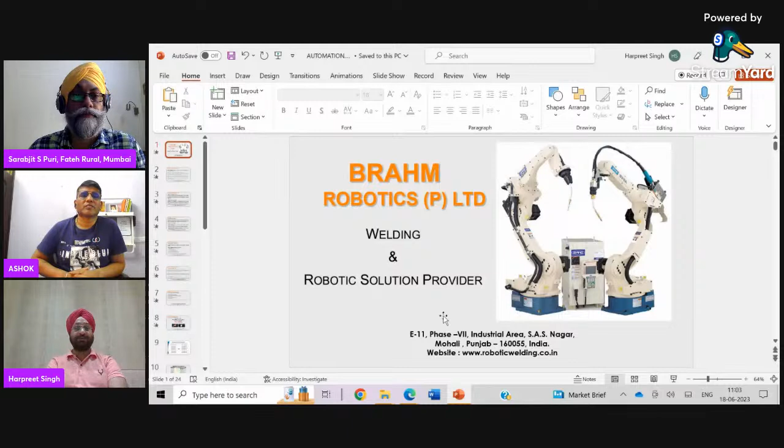So today my main presentation is what is automation, why automation is needed, and how automation can be done, particularly in welding applications, and thereafter, what new technologies have come in welding procedures. So let's start. I am the founder and technical director of Brahm Robotics Private Limited. This company is mainly into welding and robotics. Harpreet, kindly full screen the presentation. Sure.

So at Brahm Robotics, we provide turnkey solutions to customers for welding and robotic applications, and we also do robotic integration. So first, why is there a need for automation in the manufacturing industry? Nowadays we do a lot of repetitive jobs, and there are some potentially dangerous tasks being done by humans.

So automation helps the organization achieve higher productivity and efficiency levels while increasing quality. Automated production systems require less or no human involvement. Such systems also carry out assembly, sorting, testing, welding, and material handling operations. In material handling, heavy parts are lifted and ergonomic issues are there. So these can all be automated. Coming to the next level,

increase in production output. There are a lot of production requirements, so the repeated operations can be automated. This means you can increase your overall production output by having your machines run for longer periods. Furthermore, use of machines can allow you to maximize your production space by adding more workstations. Increased productivity and quality of the products.

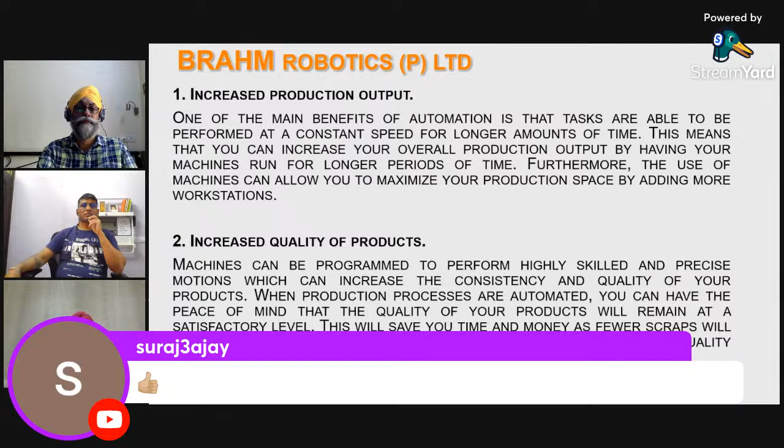Machines can be programmed to perform highly skilled and precise motions. For example, CNC machines and robots can increase the consistency and quality of your product. When production processes are automated, you can have peace of mind that the quality of your products will remain at a satisfactory level. This will save your time and money, as fewer scraps will be generated and rework will be less.

As of today, human safety is more involved. So transferring dangerous tasks to automated machines can make the workplace safer. Since the Occupational Safety and Health Act signed in 1970, the people working there have better safety for their lives and a better workplace.

System versatility. System flexibility: easily retooled and repositioned for your production programs. So this is flexibility in automation. Robots are flexible and can easily be redeployed for new applications. Robots have the ability to easily switch between a wide range of products without completely rebuilding production lines.

Quick changeovers are possible. Auto gripping and vision systems can be incorporated with robots, and the same parts can be run. So in production, it can be batch production also. Mixed products can also be used for robotic automation.

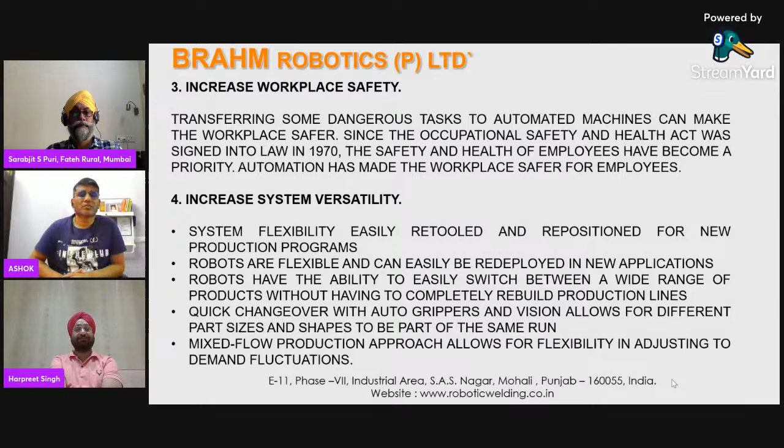Coming to the welding industry, automation in welding is most important as the working area is very hazardous. There's a lot of fumes, a lot of heat. Availability of skilled manpower is also getting scarce. So competition, quality, productivity, price has to compete with these parameters, which is why we look forward to welding process automation.

In automation, there are three major types of possibilities: fixed automation, programmable integrated automation, and flexible automation. As for types of automation in welding, there are special purpose machines, robotic welding automation systems, and robotic welding automation with quick changeover mechanism. I'll be explaining these two headings: automation in industry and the types of automation and their interlinked systems.

A special purpose machine, as the name designates, is used to operate a set of predefined operations. So guys, this is very important in welding.

Please carefully listen to this because this is completely technical and required in almost every industry, be it chemical, mechanical, automation, or any kind of industry. This kind of thing is actually required at every level. So I would request everybody to kindly listen carefully to what Harpreet ji is going to tell you. It is his sheer experience, not theory - it is his experience which he is going to share.

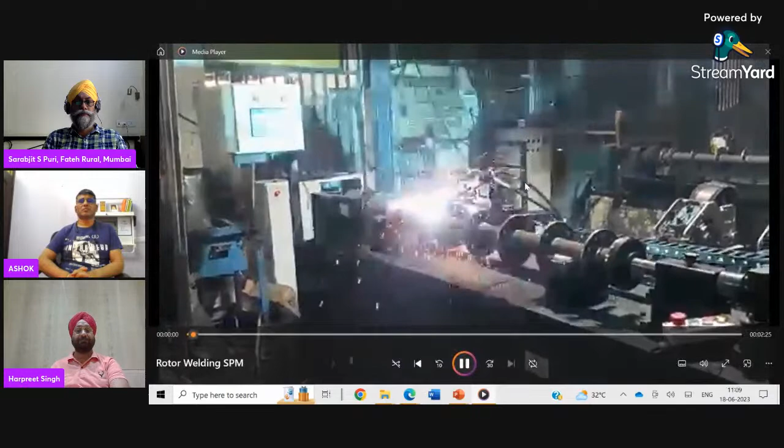So, are you getting my voice? Hello? Yes. This is a typical agriculture component.

Different flanges are there at a certain pitch. This is an SPM. These components are welded from both sides - the robots are doing the welding. No, this is a special purpose machine, and this will be doing this very application.

In this particular application, there is an application of pneumatics. This head is moving ahead and back and forth - it is loaded on a cylinder, a pneumatic cylinder, which moves this head forward.

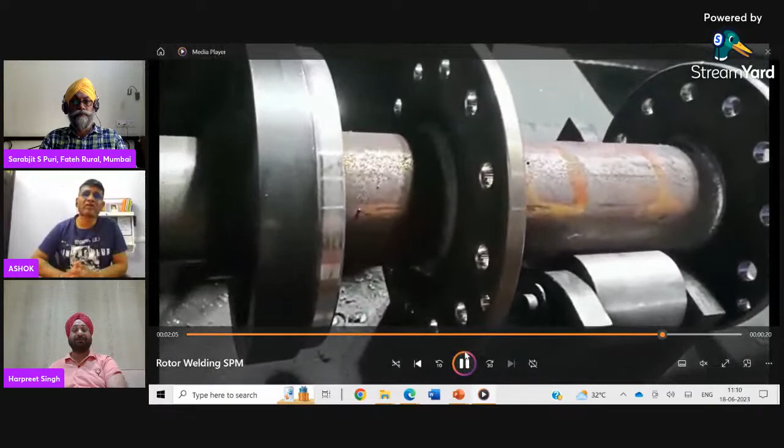Everything is being programmed through PLC, and HMI, the human machine interface, is where we can select the variety of component which has already been preprogrammed into the SPM. So once the batch is completed, you can run the next pre-programmed component on the SPM.

Coming to the SPM, this is an example of fixed automation. Like I explained earlier, fixed automation means you are doing a particular job operation - it is also known as hard automation, designed to complete a single set of tasks repeatedly. I think everybody could have understood this SPM format.

Now coming to robotic welding automation - robots are used to weld geometrically different components, some profile components, some larger components, where while welding the operator feels the heat and requires skill. So all these can be collaborated with robotic automation.

Different components are located and clamped in jigs so it can perform welding as per the sequence program. This sequence of program can be reorganized, reprogrammed, and edited any number of times - so it's very flexible to do.

It is a type of programmable integrated automation system. Programmable automation is commonly used in settings where similar items are produced using the same automated steps and tools. I'll just show you one of the videos so you'll get a better understanding of that.

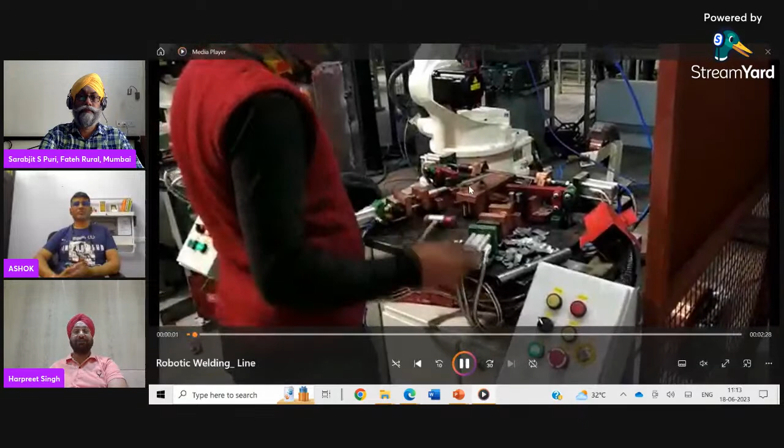So these are the automotive components, different geometry. This is a jig.

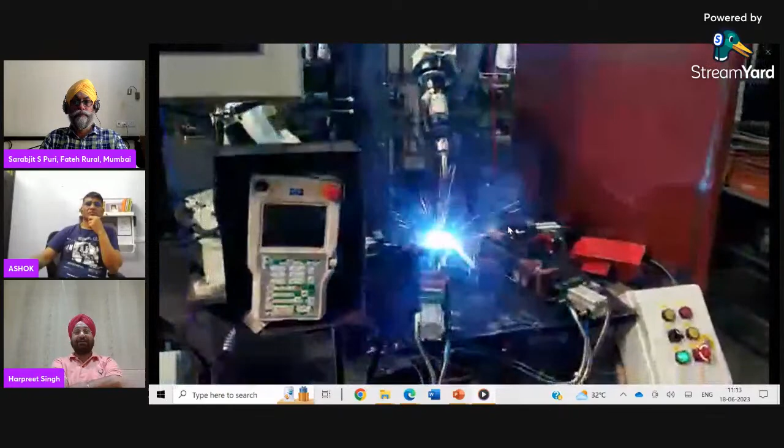This is HMI. All the signals are coming over here, whether the component has been clamped or not. If the operator has missed loading one of the child parts, the system gives an error.

So there are two workstations. One is a loading station, and the other is the unloading station. Once station one completes its job, the robot will finish, while the operator is loading the next job on the second station.

These jigs are designed to the level of poka-yoke also, to eliminate the failure of part rejection.

So again, this system has entire clamping and declamping done by pneumatic cylinders. And these pneumatic cylinders, whether the stroke is forward or reverse, this is also being fed to the HMI.

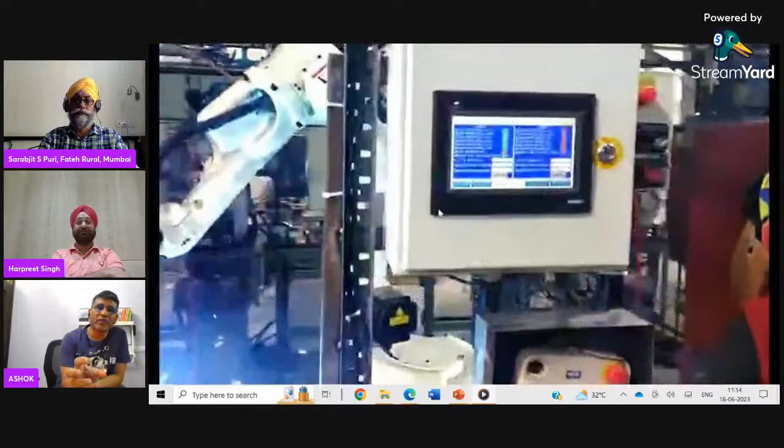That is through the reed switches, which are mounted on the cylinder. So it tells whether it is in forward stroke or reverse stroke. The operator will immediately come to know by reading the reed switches, which show the position of the cylinder.

So guys, there are two comments for you. Karamjeet Singh Gale Saab says, great to see you, Puri Saab. He's very happy to see you, Puri sir.

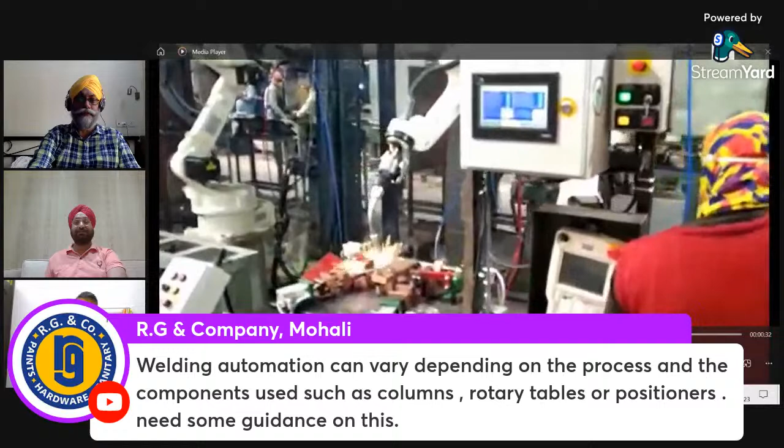And secondly, RG and Company Mohali says, welding automation can vary depending on the process and the components used, such as columns, rotary tables, or positioners. Need some guidance on this. Can you guys please guide us? Yeah, yes.

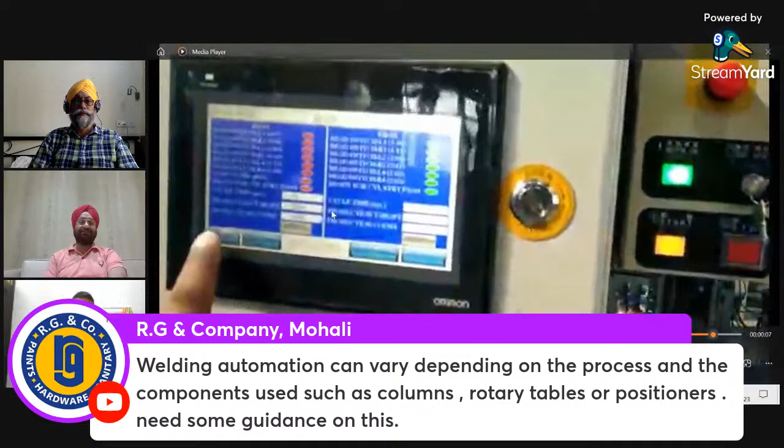Turntables can be also incorporated. I'll show you the videos also, the projects we have done with turntables, friction indexing is there.

So this was a robotic welding automation, and it is a programmable system, as I mentioned earlier, a programmable integrated automation system.

So next comes flexible automation. In flexible automation, integrated automation involves totally automating manufacturing plants with minimal human involvement. Computers can be used, basically this is a CAD-based system, used to design parts, test the completed design, and then fabricate new parts.

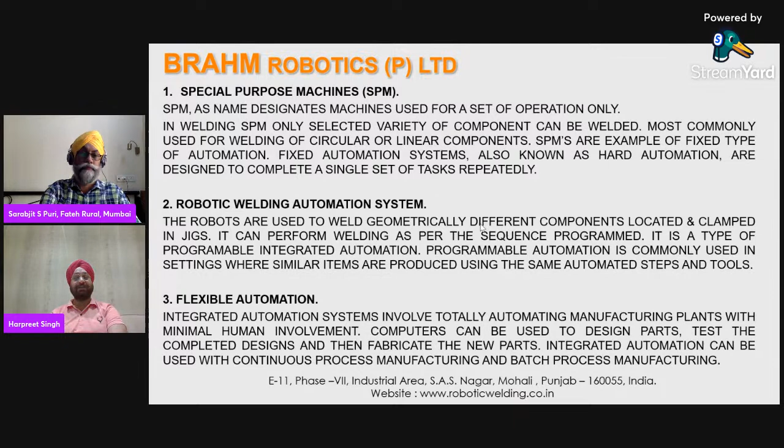So this is a CAM-based programming system. You program your components on your CAM software, then load those programs to the robot, and the jig is all there. Load the component in the jig, and the robot will perform the similar application on the component.

So it's a part of robotic automation also. Integrated automation can be used for continuous process manufacturing and batch process manufacturing. I'll show you one other video.

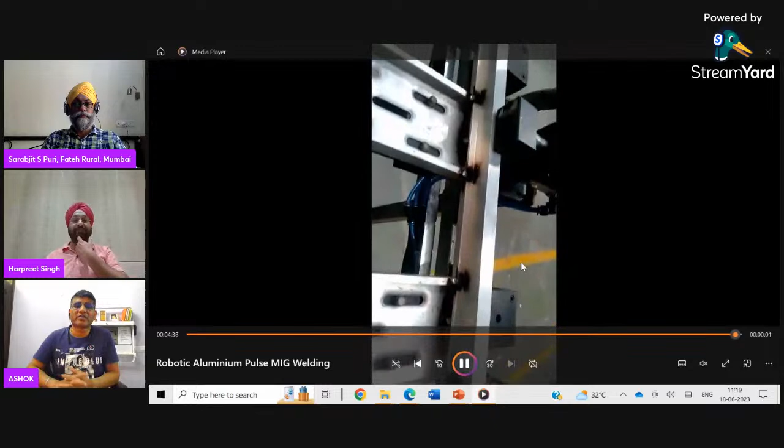And the quality of welding, you can see that it is perfectly consistent. There will be no place where somewhere it will be more or less - this is what we get due to automation. The blackening during weld is due to oxidation, so it has to be cleaned chemically later on.

Now coming to the welding processes that can be automated - the technical name is gas metal arc welding, we call it MIG. Gas tungsten arc welding, known as TIG, then resistance welding, laser welding, flux core welding, plasma welding. These can all be automated through SPM mode also and through robotic mode also.

I'll just show you one of the videos of SPM for the tungsten arc welding.

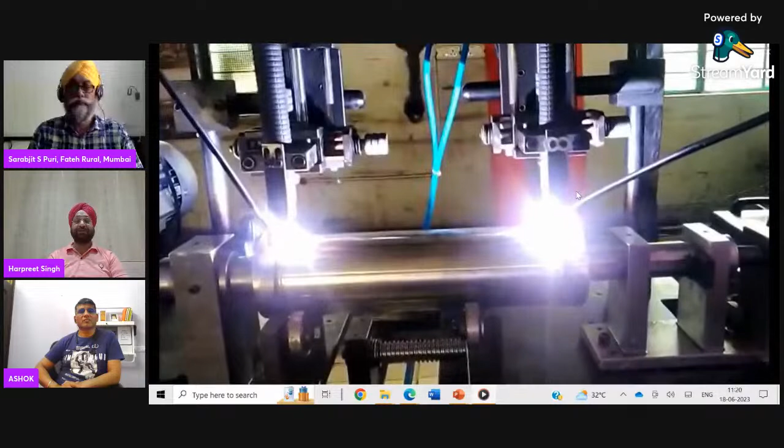This is a submersible motor housing. Both end flanges were welded manually through the TIG process, so we have designed this SPM with an auto TIG filling system. There's a circular part as you can see on the video. The operator only has to load and unload the part, and this machine is designed to adjust different lengths of these cylindrical submersible pumps.

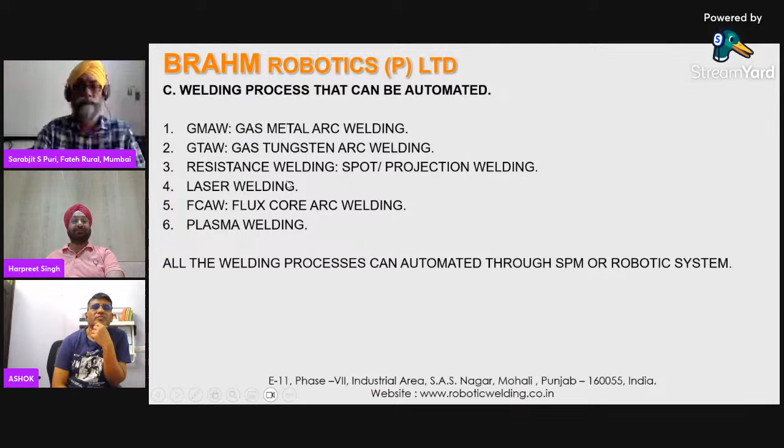The rotation of this cylinder is done through the servo drive, and the torch slide's up and down movement is through pneumatics. So similarly, as I've shown you earlier for MIG welding, the tungsten welding system also works this way.

Now coming to the new technology available in MIG welding applications. As you all know, if the thickness is higher than 15 mm or 20 mm, we have to either prepare a groove and then make multiple layer welding. In that case, there is a lot of distortion also.

Now you can see this is a 20 mm plate. You have to make a large groove, then there are multi-pass weldings, and a lot of distortion is there.

Now there is a new technology that has come up known as D-arc, which is basically a buried arc technology. No groove is required; you just have to give a 1 mm gap between both plates. Single pass with full penetration is there. Can you imagine? The wire size is 1.2 or 1.6. Earlier we were using 1.2 with multiple layers, causing a lot of distortion. This is a single wire pass with wire size also 1.2, but the technology is such that it welds through the part and gives less distortion in the part.

I'll show you one of the videos. Sorry, the video is missing right now.

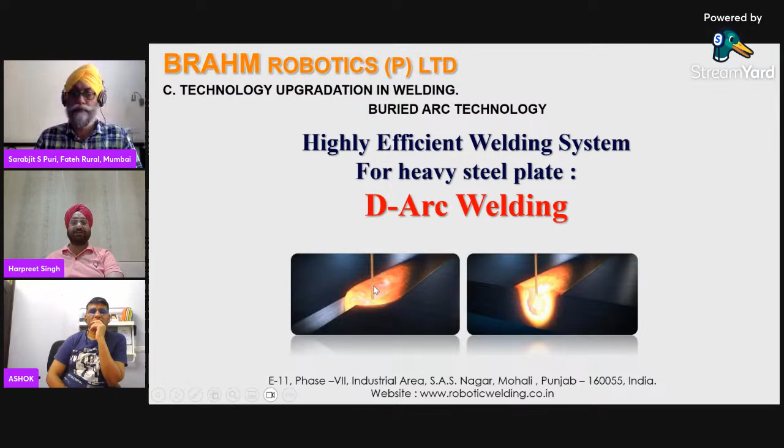The gas used is also CO2, which is a very cheap gas. No argon mix or such gas is required, so the advantage is there.

Either you will be using SAW, submerged arc welding, or the comparison is with D-arc. Angular distortion is there, and D-arc has a single pass value with full penetration. Process flexibility is there; this can be used with robots also. SAW cannot be used with any type of automation. Either linear welding or circular welding application can be used for SAW welding, but D-arc can be used with robots also for different profile welding.

Wire consumption is higher in SAW; D-arc wire consumption is low. Heat post-process is not required. Welding speed is higher, and deposition is again higher in D-arc.

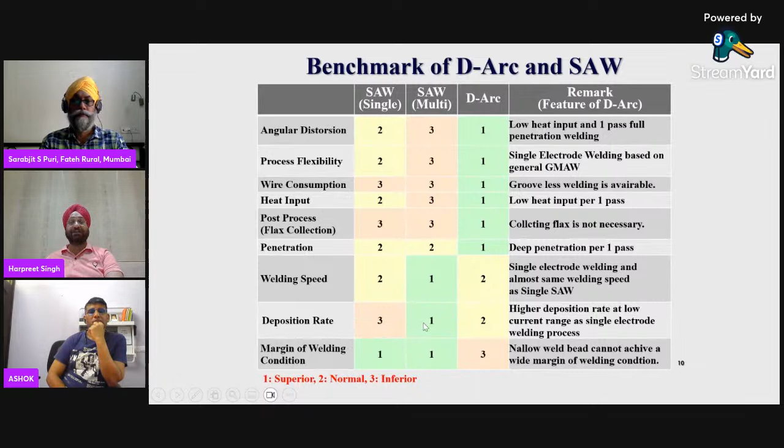Harpreet, there is a question: the cost of robotic welding versus the cost of manual welding process. How can robotic welding lower the cost of production, and how can automation welding process save some cost besides having great technology? These questions are by Mr. Vivek.

In manual welding, all the parameters, whether fixed or SOPs followed by industry, somewhere it is all dependent on the welder. He, as per his convenience, readjusts the current, voltage, or welding speed. If he is tired, he'll use his own method to weld, so there will be quality issues in the component. Whereas in robots, all program parameters have been programmed and cycle time already established, so there are no chances of variation in the process itself.

Moreover, on consumable cost, when the welding parameter has been fixed and optimized, wastage of wire and gas is not there as compared to manual applications. So in our experience, comparing manual operation versus automation process, there is a saving of 15 to 20% on consumables itself. Consumables mean MIG wire, torch consumables, MIG contact tip, and other consumable parts, and in fact on the gas also.

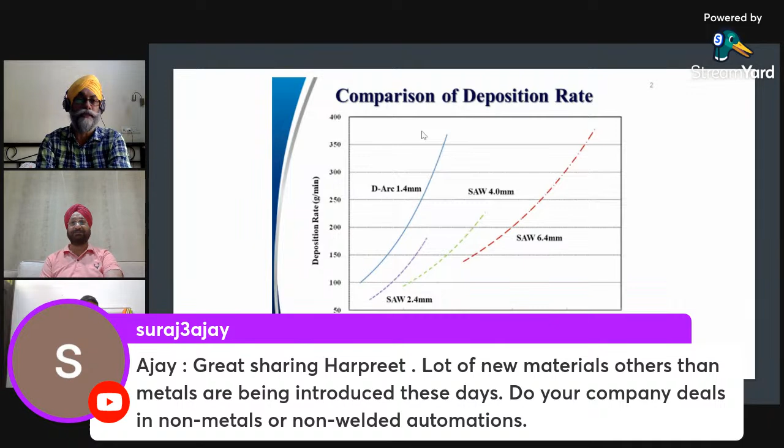No, we are currently presently purely into metallurgical applications only.

Okay. Fine. Ji sir, please carry on.

In automation, how do people go for automation vis-a-vis manual operations? They call us and ask us, sir, this is the component we are producing and our current requirement is such numbers per day. And we have 10 welders right now doing this operation. So you give us the proposal. So we work on the concepts, how it will be welded, how many stages will be there, can it be welded in a single stage or multiple stages, and what will be the total welding cycle time for the part. So we give them a comparative cycle time also.

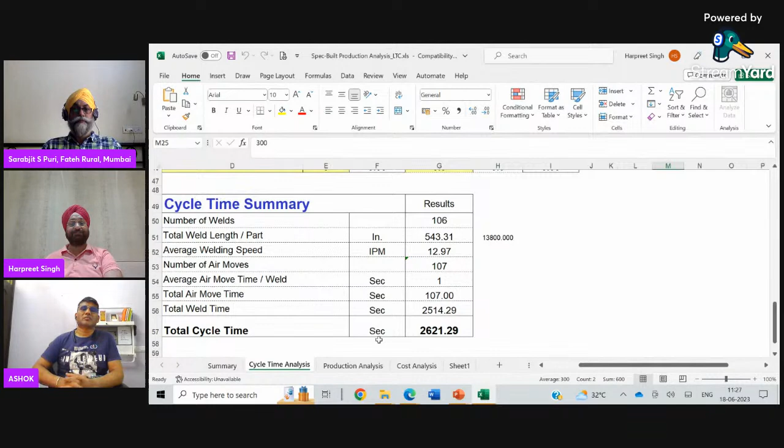I'll just share one of the cycle times with you. Here is a part, I'll just show you. It has 13,800 mm welding, means 13.8 meters of welding. Is it visible to all? Yes. And it has 106 points where one weld has to stop and another has to start and restart. So we have calculated the cycle time. It comes to 43 minutes

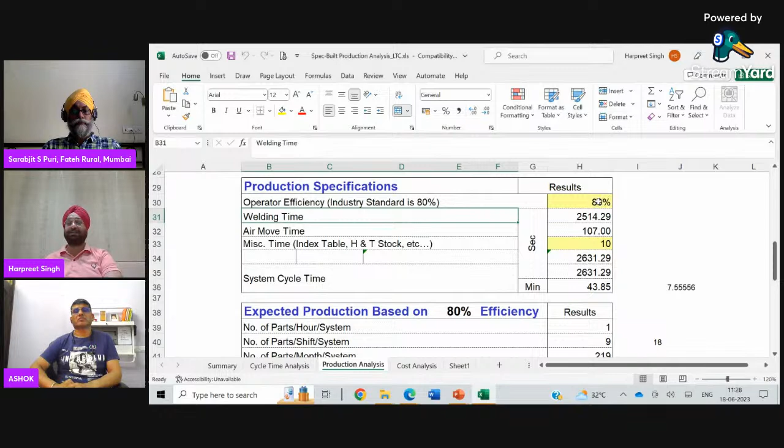at 80% efficiency. 80% efficiency is because this system at the end of the day is to be run by human beings. So we can't go by 100% efficiency. So it's an industry standard, we use 80%. So in 1 hour, one component, and we have taken a shift as an 8-hour shift, 9 components will be produced. So from here, the company can analyze whether this system will be beneficial to them or not. And this will have only one operator.

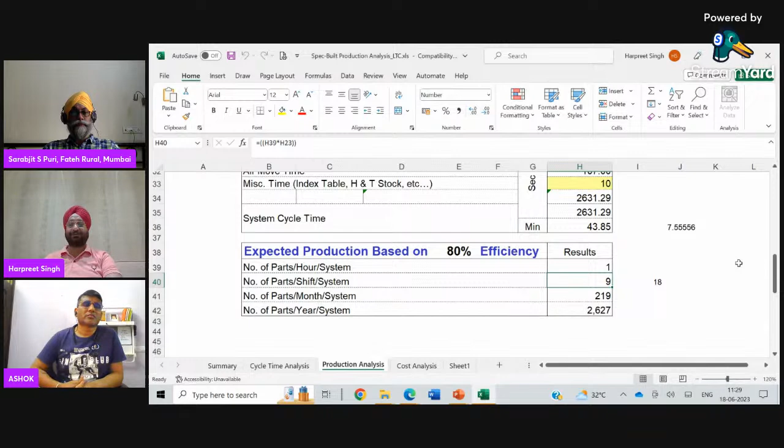Whereas for welding this component, they are using 5 to 7 welders. One will be pre-tacking, then moving to the next stage. He will do the next level of welding, then move to another station. So in a single station, this will all be done through the robot. Basically, removing the part from one welder to the second welder, clamping, declamping, then transferring that part to the other welding station, a lot of time goes in that. And a lot of energy is also required because this is a very heavy part, so they need crane movement also. So once they load it into the robotic system, it will be completely welded and taken out of the system. Yes, exactly.

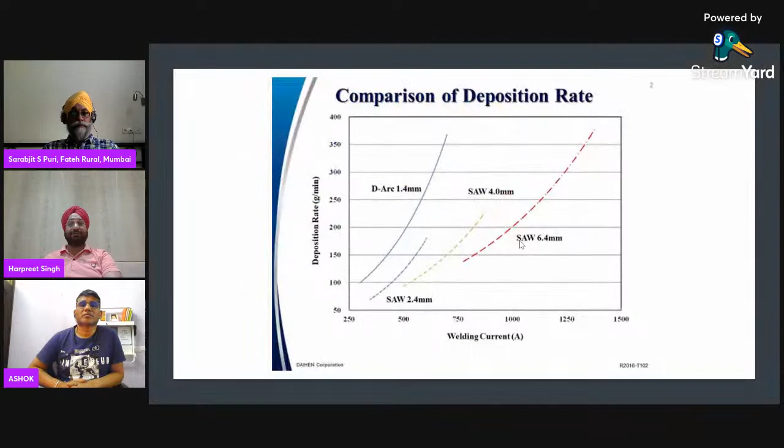So now coming to the next. As you all know, in MIG welding, when you are welding manually, there is variation in hand movement. Basically, the arc length changes, as all the welding people will know. The arc length change impacts the weld bead quality as well as the penetration at the joint. So to maintain the arc length and the spatter level, since as the arc length increases the spatter level also increases during MIG welding, most machines nowadays are coming with microprocessor arc control systems.

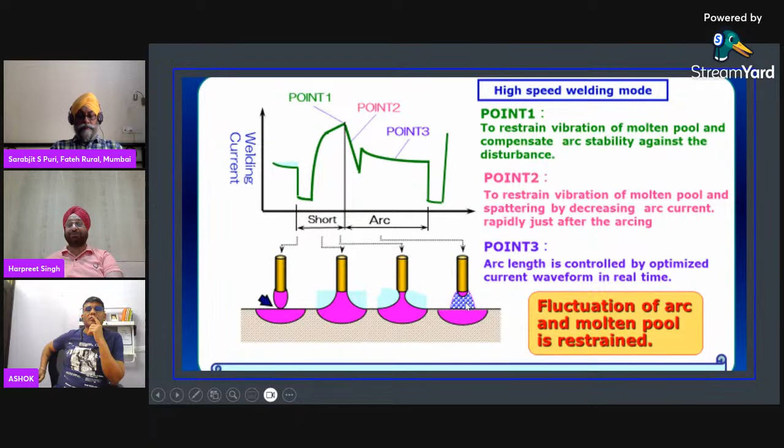Moreover, it helps in achieving welding in a faster mode. I'll just show you. High speed welding mode. So there is short circuit, then the arc stability. The arc will be maintained with the correct current waveform in real time, so the weld bead will be uniform like this. This is through the nanoprocessor, यानी कि high speed mechanism and latest technology. This is the conventional machines. Whereas the spatter level is also less, that is micro spatters.

Any questions on this? Yeah, guys, any questions, please come up so that they can answer your questions if you have any. All the students in welding technology can ask questions from the slide, and Harpreet ji can answer them immediately, because you guys are studying it and it is something really industrial which is required.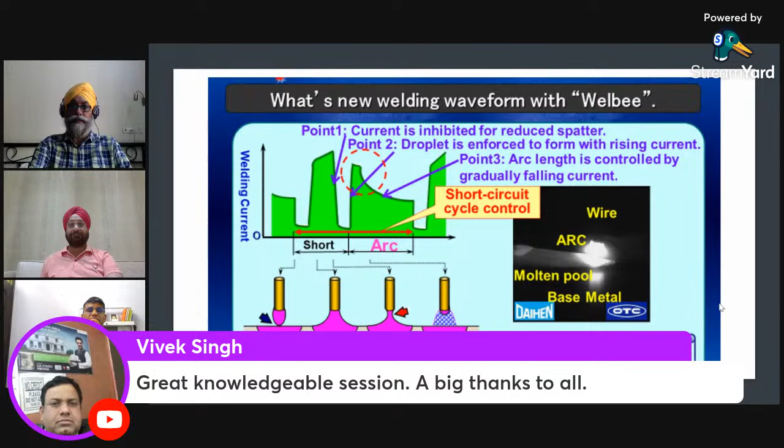Vivek Singh is writing: great knowledgeable session, a big thanks to all. Thank you, Vivek ji, for joining. Yes, sir. Yeah, carry on, sir. Okay.

So this is the latest technology that has come up, that is high-speed welding. Most of you who have experience with MIG welding have seen that when you check your MIG wire after welding, there is a droplet formation at the end of the wire, like this.

So how does this droplet help in reducing the starting arc spatter level? You must have experienced that when the arc is started, a lot of spatter is generated during the first short circuiting of the wire with the base metal. So when the surface area of the MIG wire is increased, more short circuit area will be happening over there, so it will create spatter.

So now technology has come up in which the globular formation on the wire is very less. That will reduce the short circuiting area and also the generation of spatter during the arc start itself. So this is a pictorial, you can very well see over here. Over here there is low formation. There is a thin formation.

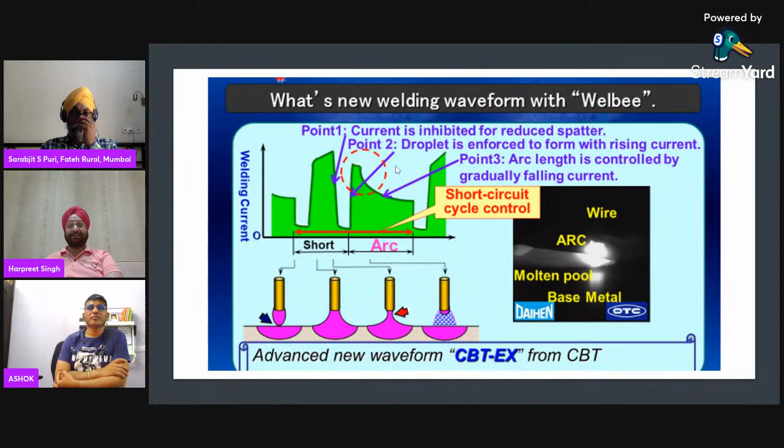So these are the technologies that have come up for thick applications and for thin applications. We have a system that can weld 1 mm sheet thickness with 1.2 MIG wire. This technology is known as synchro feed, and without changing the wire, you can weld thick plate also with 1.2 wire.

Like this, you can see plate thickness 1.6 MAG, and you see the current and voltage also. And this is the penetration, and the bead is very flat.

So, sir, there is one more question from Gursewak Singh Uppalji. He says, "What's Brahm's USP in being a top robot supplier, while there are so many brands available in the market, cheaper, like Kuka, ABB, Yaskawa?"

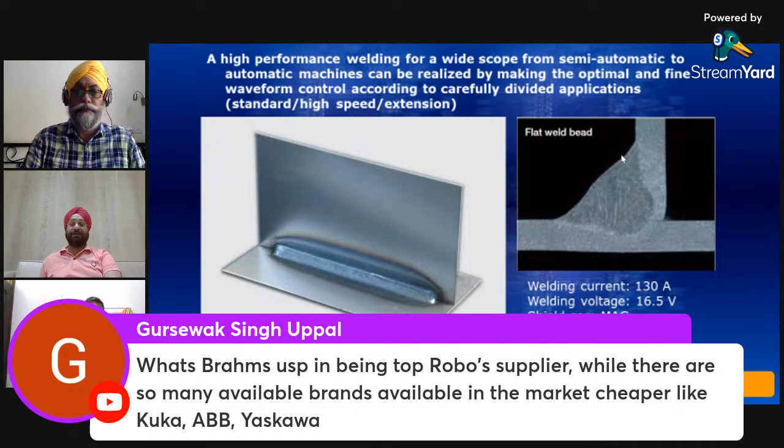Yeah. Actually, the USP is that we are a robot integrator and we are associated with one of the world's renowned companies, that is OTC Daihen. It's a Japanese company. They are the single source manufacturer of robots as well as welding machines, and they have different varieties of welding machines for different applications with different technologies. And with us being their robot integrators and distributors, the customer has the advantage of a single source service provider.

So as you know, robots are standard equipment. They have to be customized and automated as per the application. In industry, there are different applications that vary from component to component, customer to customer. So we give turnkey solutions to the customer, which include the robot plus the welding machine.

The companies mentioned by Gursewak Singh Uppal are only into robots or cobots. They are not into welding equipment. So the USP of this company is that they have all the things related to welding. So they know the ins and outs of the welding field. That is why it is more preferable over the others.

Yeah. So in a robotic system, once the solution has been installed and handed over to the customer, it's very simple that some problem is going to come in future, some breakdown of the robot or welding machine or in the automation, whether from the operator side or from the system. Customers are dependent on this automation for their production. So once there is a breakdown, they need an immediate service call from their solution provider.

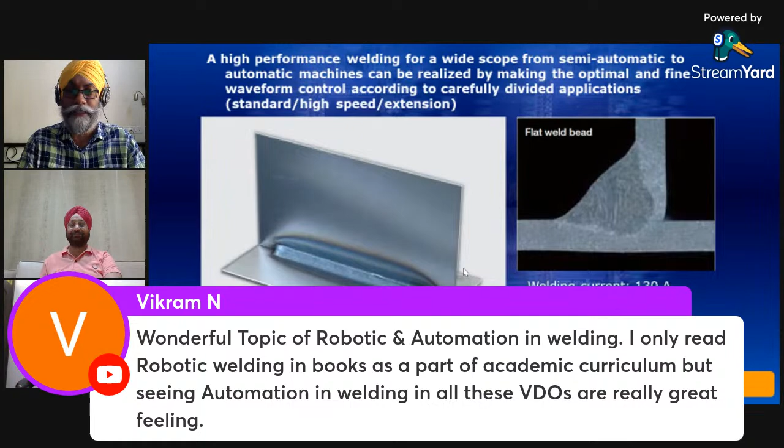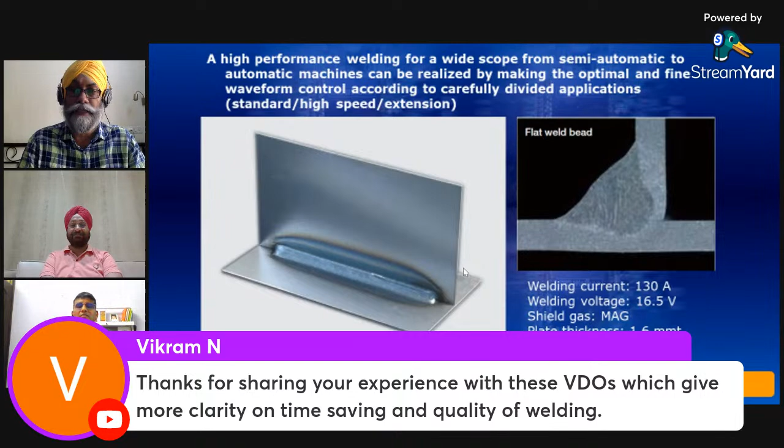Vikram Nanda says, wonderful topic of robotics and automation in welding. I only read about robotic welding in books as part of the academic curriculum, but seeing automation in welding in all these videos is a really great feeling. Thanks for sharing your experience with these videos, which give more clarity on time saving and quality of welding. Current graduates will learn by watching all this automation, and it may help them grasp automation with ease. Thank you, Ashok Saab and Harpreet ji, for this wonderful presentation.

And there is one more question for you. Yes, sir. Vikram Nanda ji is enjoying the welding videos by you guys, and I'll tell all of you that these videos are the real works of Brahm Robotics, and being founder of Brahm Robotics, Harpreet ji has been involved in all these works himself, so he knows the ins and outs. So you can learn a lot from him and really build your career in this particular segment.

So Raj Tagore says, sir, welding tool cleaning and changing is also required from time to time. Is this manual or automatic? How is this done?

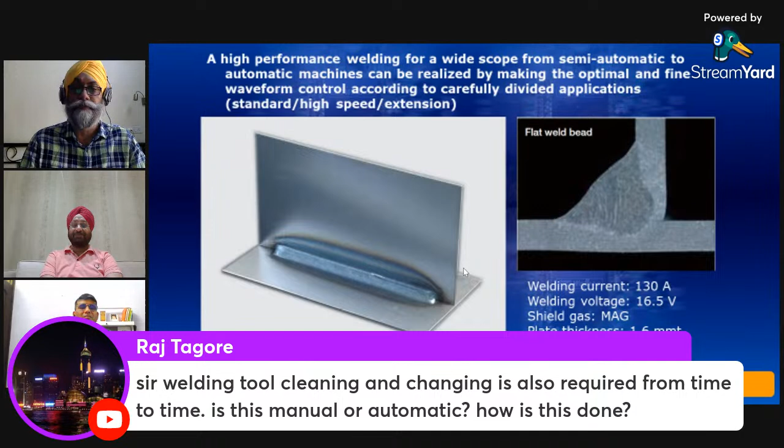It depends on whether you invest in the torch cleaning station. Torch cleaning stations are there, so we also provide those torch cleaning stations. We program as per the component length of the weld and how many spatters are generated in the torch itself. So it's a cyclic process. The robot, after welding 10 or 15 components, automatically goes to the cleaning station, the torch cleaning operation is done, and it goes back to its work. I'll show you one of the videos.

Okay, let's move on to the next. Yeah. The operator is standing by the side and enjoying. Enjoying. Actually, I was preparing that.

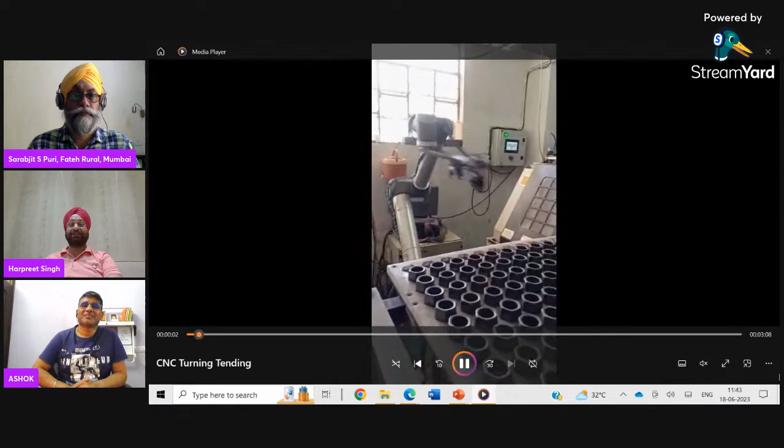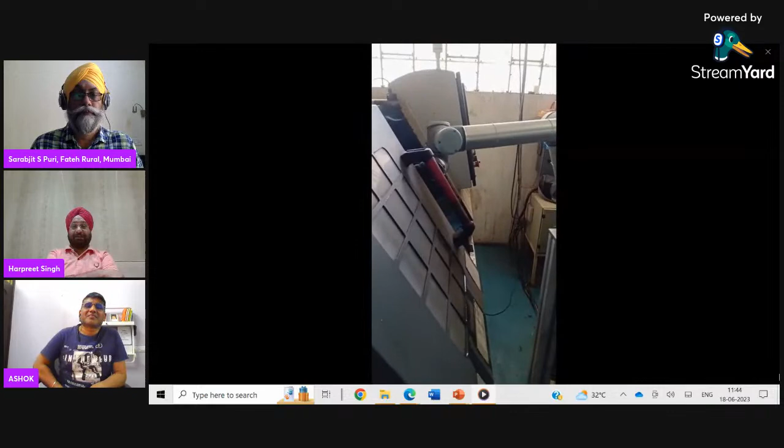So now coming to robots in handling automation. These are CNC turning centers. This robot is cleaning chips also, then unloading the part, loading the new part into the chuck, and then it drops into the bin. This is the input tray from where it takes up the components. This is a multiple tray, designed with a capacity for 3 to 4 hours of production.

So this is the end of the robot. There is a gripper, a pneumatic gripper, which is holding the component. It is feeding 3 to 4 machines depending on the operation on the part. Like that, it is removing the part from one machine, then feeding it to the next for the next operation. I think this eliminates around 4 to 5 people involved in this process. So this is how automation helps the industry reduce manpower and generate more production.

I just want to elaborate one more thing. This CNC turning machine didn't have an automatic door closing and opening system, so we incorporated this into the machine. Yes. So now this system doesn't need any lunch break or tea break. It will keep on performing during that time also. Yes, exactly.

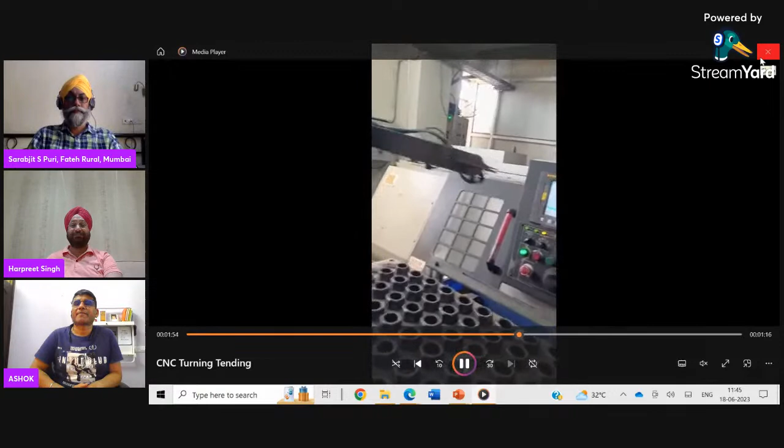Now coming to the next. This is press tending. There are 2 machines. One is the assembly press. These are steel rims being assembled on this press. The robot takes out the component and loads it into this welding SPM. And this robot unloads the component from there to the conveyor. This is a steel wheel, or you can say rim of a vehicle, which is being manufactured. So the entire thing is automated, from pressing to the welding application.

All safeties have been taken care of during programming and automation of the system. If the robot has no component, we have a next-level operation safety mechanism so that the machine will not run, and the robots will not interfere with each other. This project also has been done by our team.

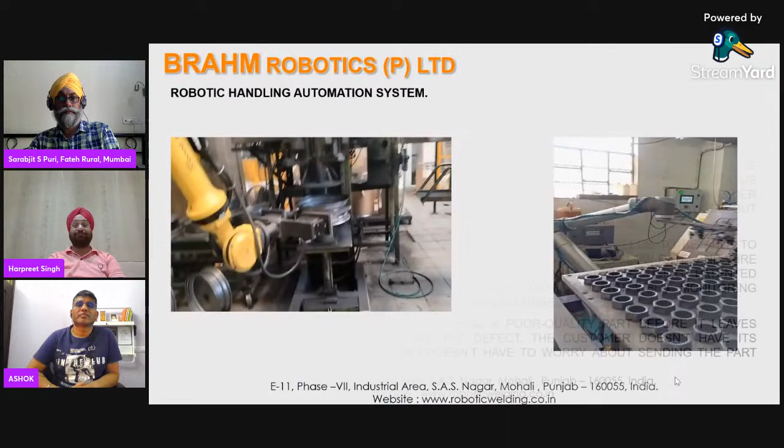Thereafter, now coming to welding in Industry 4.0. Industry 4.0 is gaining a lot of importance in today's manufacturing. Basically, it is based on the Internet of Things, IoT. With Industry 4.0 in welding, you get real-time welding data on your desktops.

It's basically an automated weld monitoring system. It brings digital connectivity to the welding department. So whether it's a manual operation or the automation solution, we have a technology that can be connected to your desktop and you can see real-time welding details, like you have set up a machine at 100 amperes and at 14 volts and the length of weld has also been defined.

So you can get the data on your laptop, whether the production was done on that machine, particular station, what was the welding time, what was the current, what was the voltage, and in fact, what was the input voltage also. The input means main supply, whether it was 220 volts, 420 volts, 415 volts, or any inline fluctuation was there. And moreover, you also get the wire feed rate.

Feed rate is more important in welding because feed rate is directly proportional to the current. As you increase or decrease the current, wire feed changes. In case your arc length changes, wire feed again changes. So if the motor or the wire feeder heats up, it will be less efficient and will not give proper feed rate. So that data also you get on your system. I'll just show you one of the presentations.

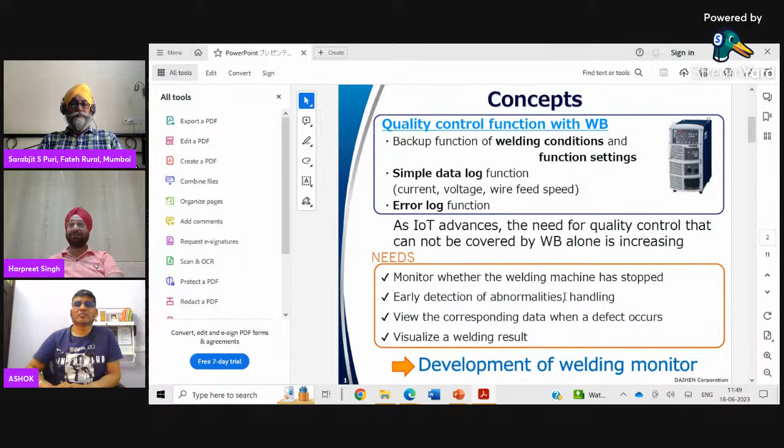Simple data log function. You get the current, voltage, wire feed speed, errors, what errors have come up. This is IoT based. Monitor whether a welding machine has stopped. Earlier detection of abnormalities like the machine heating up, the wire feeder heating up, or input voltage out of range. Through a PC Ethernet Hub, you can connect 100 welding machines and get all this data on your desktop.

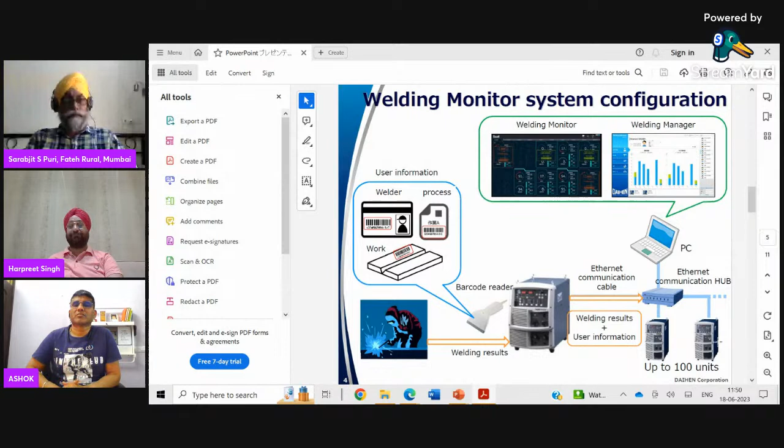What is the user information, what processes we define, who's the welder. Even in the automotive industry, there are barcodes. You can have a barcode reader to trace the component, so when some field failure comes in the automotive industry, you can trace whether it was a welding error or a material defect. So you get all this online in real time on your desktops.

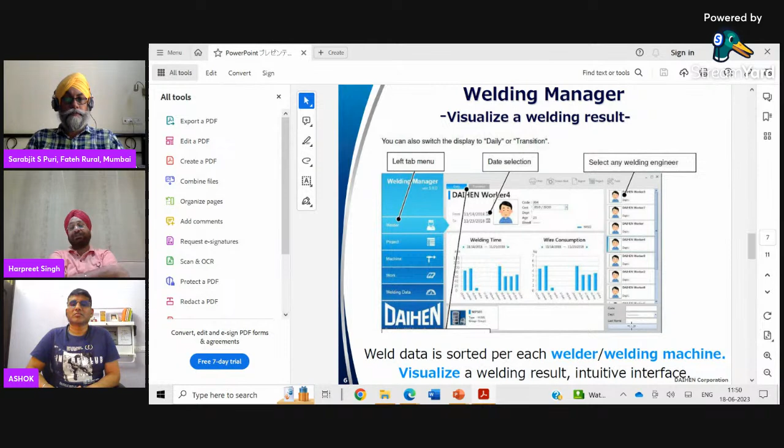You also get the complete data of what was the component, date, who was the welder of the day, and it's a very intuitive interface for the supervisor or the welding engineer to manage their welding details. Any question on this part?

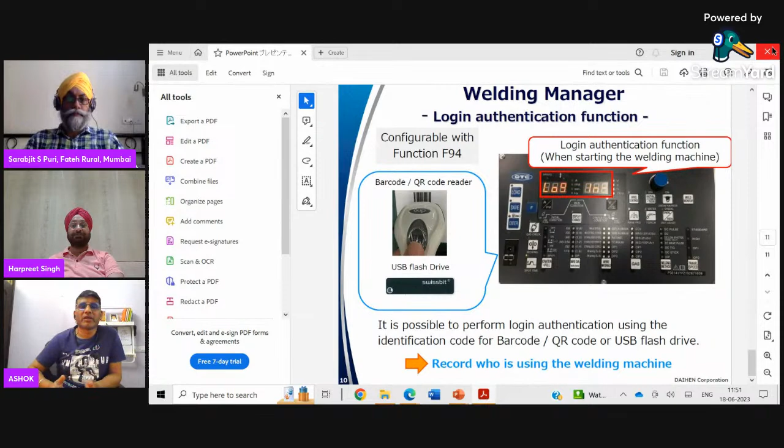So I will be explaining a few terms mainly connected to 4.0. I will explain in simple language so that it can be understood by the attendees, like Mr. Harpreet Singh has told about 4.0.

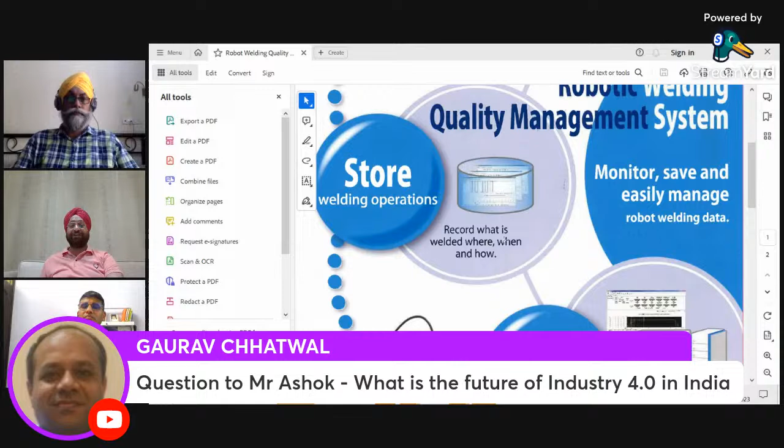This system can also be collaborated with a robotic system. Record what is welded, where, when, and how. That is more important. You get real-time notifications and information on your desktop: gas supply rate, gas pressure, welding power supply, primary voltage, internal temperature, even cooling fan. Because as the machine heats up due to inefficient fan cooling, the output also varies. So you get feedback of the welding cooling fan also.

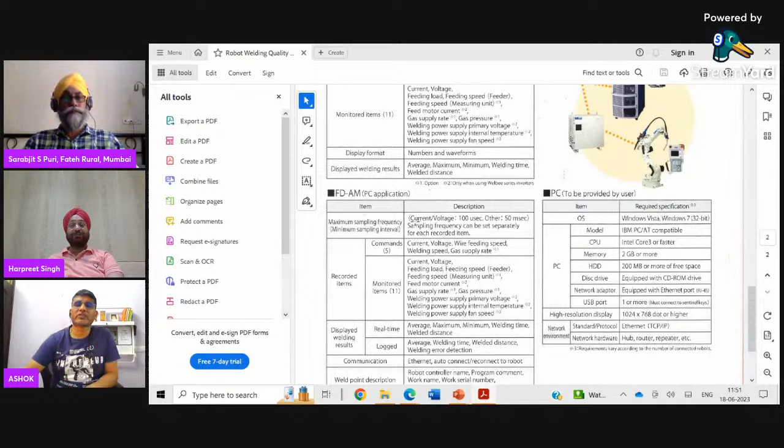So actually, that affects the welding quality. Yes, welding quality. So that has to be controlled, or that feedback is also required in that case. Yeah. The feedback is at 100 microseconds or 50 milliseconds sampling for each weld gun. And with one software, you can connect 32 robotic systems.

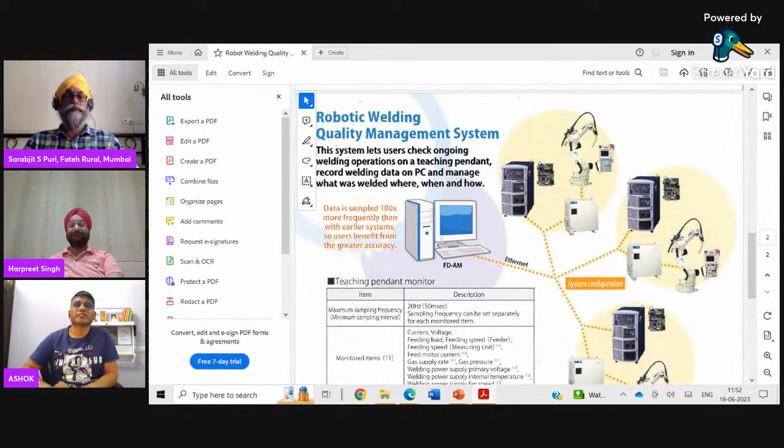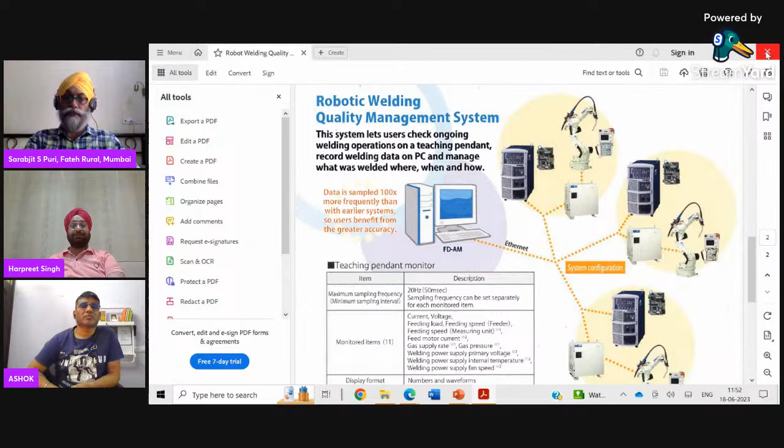Superb, Harpreet ji. This is something really fantastic happening in the industry. Now, there is one more question from Gaurav Chhatwal. It is for Mr. Ashok. What is the future of Industry 4.0 in India?

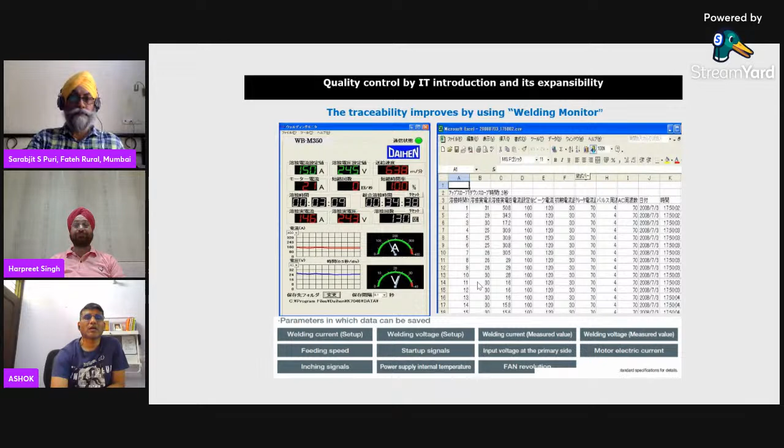I think now it's Mr. Ashok's time to take over and he can talk about 4.0. If you want to present something, certainly you can. Harpreet ji, we can come out of your presentation and he can start. Sure. Mr. Puri, can you share my screen? Just hold on. Please present yourself first, Ashok ji. I think your screen is visible now. So this is one slide. Is it visible to all? Yes, you can do the full screen, sir. Sure.

Just a minute. It will just give an idea of how SMC is working on Industry 4.0. You can just have a look. Can you please full screen it? This is what.

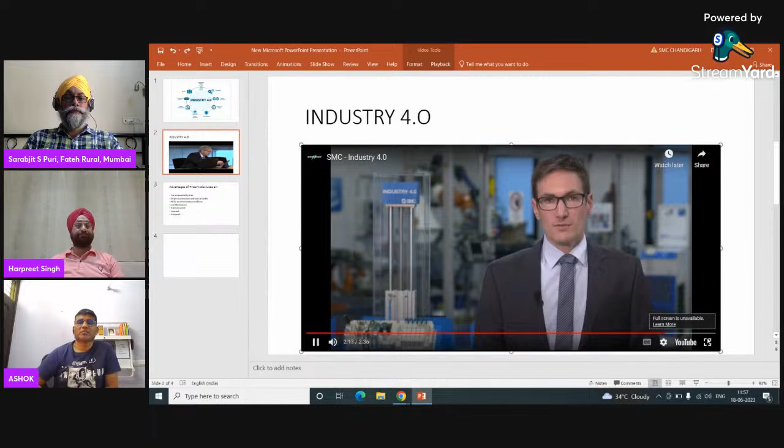So this is a small video, just giving you the way Industry 4.0 is now integrated into the industry. So what is the requirement of Industry 4.0? The most live example of Industry 4.0 nowadays is Amazon. This is the fourth industrial revolution. In the third industrial revolution, the industry was going for the mass production of everything, and that was the requirement at that time.

Now this has reduced drastically to a lot size of one. Say we are ordering on Amazon; take an example of a shoe. At one time, say 100 people are ordering shoes on Amazon, and they are ordering as per their requirement. Of a single company, 100 people are ordering 100 pairs of shoes, but all together different. So now Amazon has to provide them the shoes as per the customer's need. That is why the lot size of an item is now one, and that is why Industry 4.0 is required nowadays.

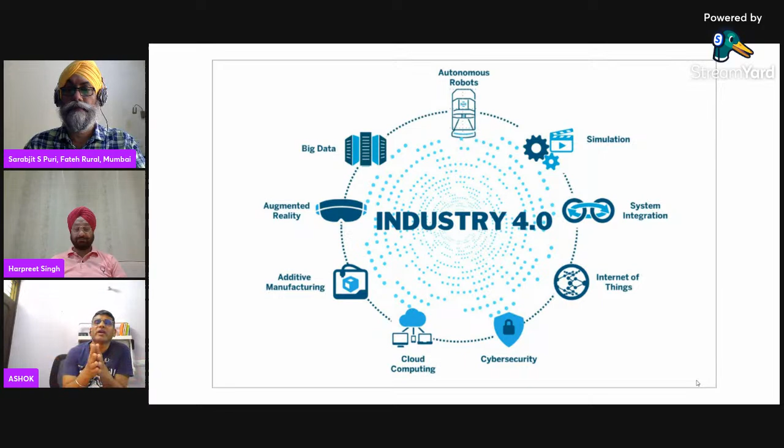And the question of Mr. Gaurav is, what is the future? Industry 4.0 has actually started recently. In India it has just started. Only the big groups like HUL, ITC, Dabur, and these big MNCs have just started 4.0 in the industry. Otherwise, at the lower level of industry, since it is automation of that level, small industries are not able to afford these technologies.

So what are these terms, what is big data? Big data is basically a real-time data flow, exchange of data, complex and big data, a large amount of data being transferred and shared. That is basically big data.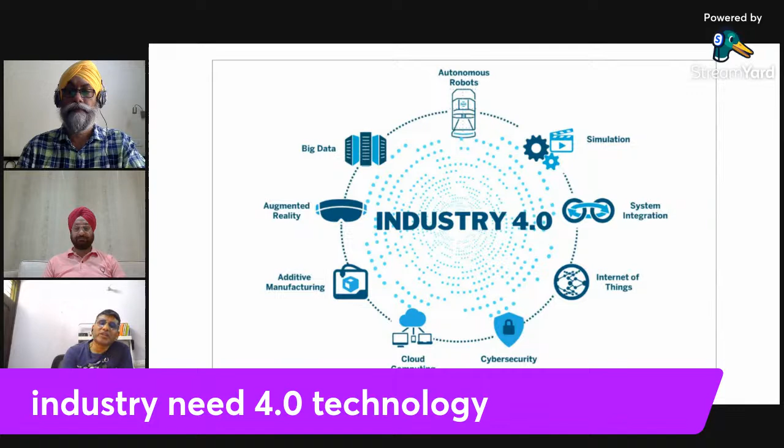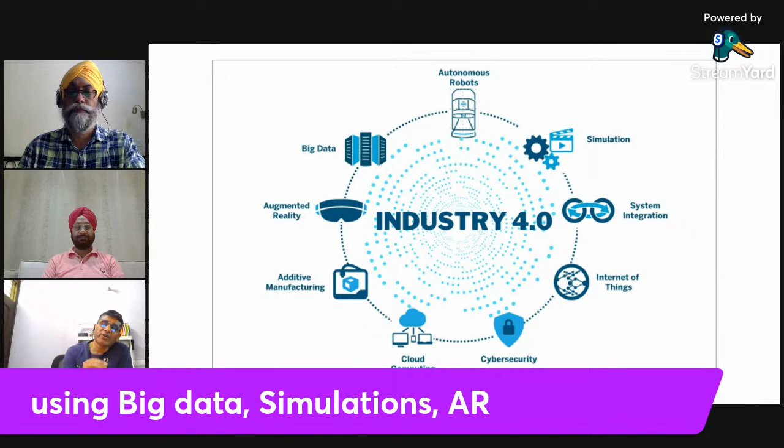Augmented reality: likewise, you have seen in the video that particular component which failed. The person is sitting at another place at a distance. There is a problem at site number one, he is sitting at site number two, but he can actually see the component details sitting at the laptop itself, what this component includes, how it functions and all that. He need not refer to the books, which may or may not be available with him. So that is augmented reality, AR.

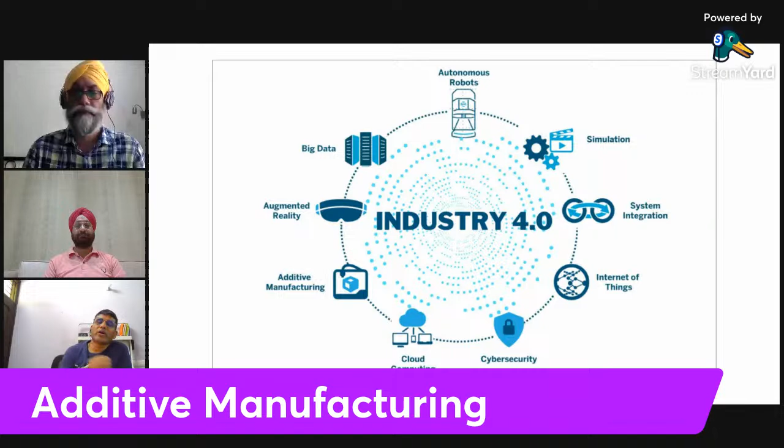And then additive manufacturing, so we can add and delete the material depending upon the process. And cloud computing, calculating all this data at very high speed. That is basically the requirement of this. And Internet of Things: the components installed in the machine are with sensors, transferring real-time data to the required people. So that is the Internet of Things, which is required for real-time monitoring.

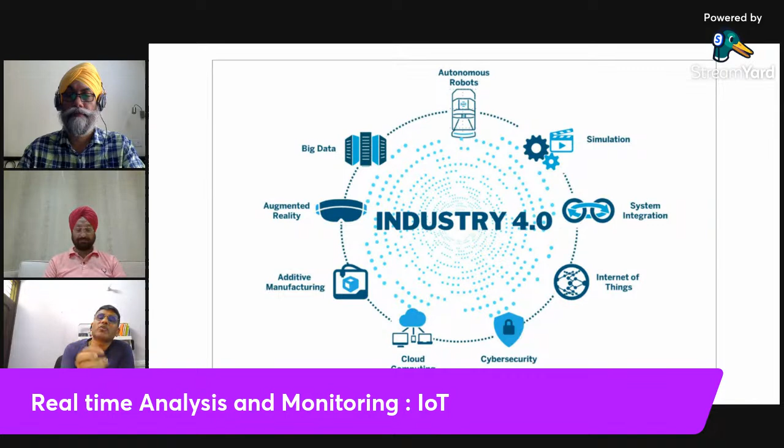Simulation stands for, before running an actual process, we can do it on a simulation and check for abnormalities of the process. That is why simulation is required.

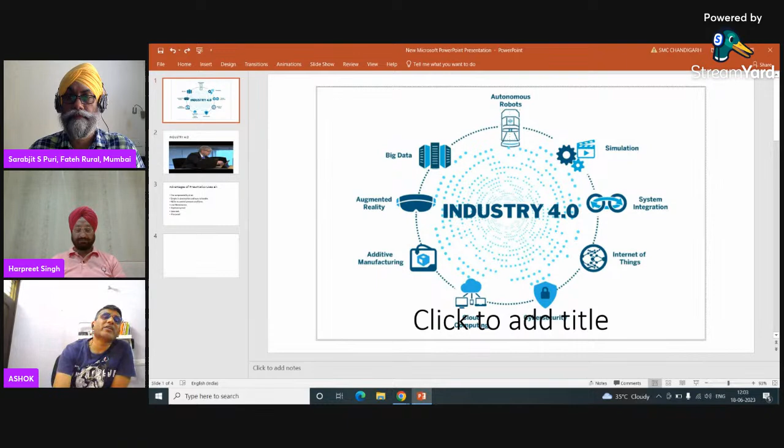This is the compressibility of air, why it can be compressed to achieve the desired pressure. That is the compressibility of air.

Simple in construction, easy to handle. Nothing special is required, special equipments are not required, only compressors are required. And air is available in abundance in the atmosphere.

That is why there is ability to control pressure and force. There is every control of pressure, and controlling the system is in our hand.

Then, explosion proof. There is nothing kind of explosion there. It will not be an inflammable thing.

That is another thing, low cost. The costing of the entire pneumatic system is very low as compared to others, you can say electrical actuators and hydraulic systems. It is simple, not very complex, and the costing is very less.